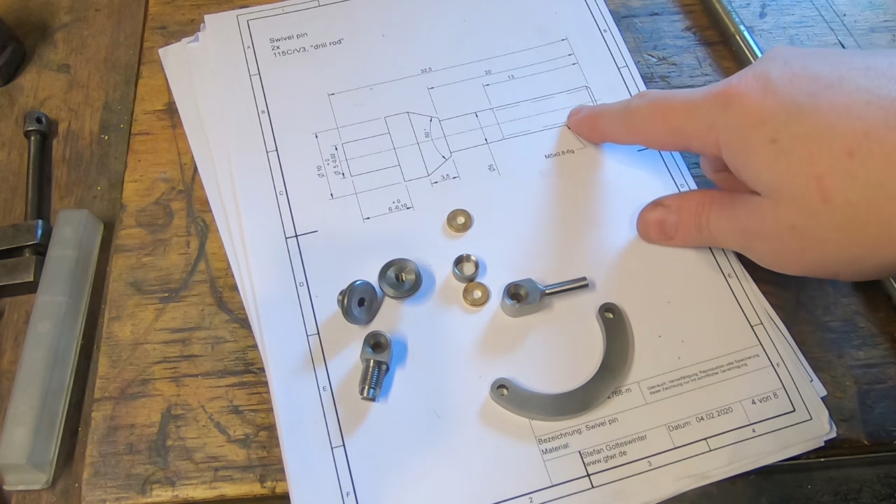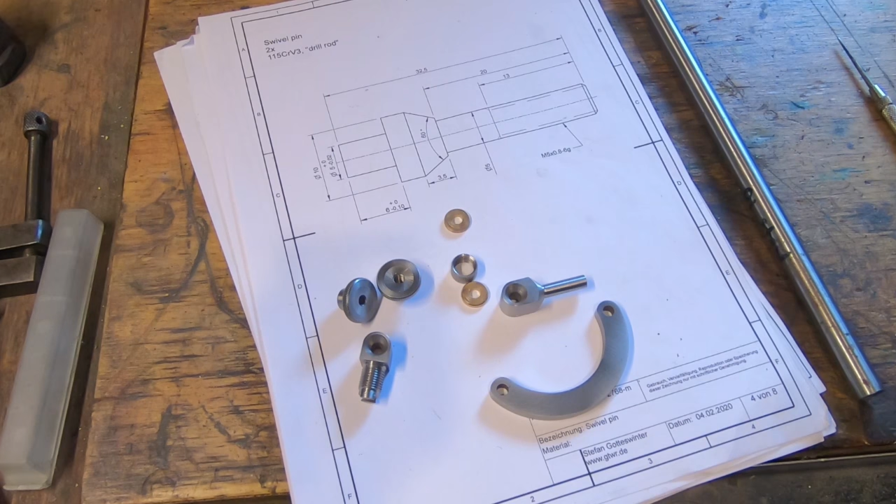Back onto this build. We've got two more bits to make. The last sheet of drawings are these two stems. Now, there are a couple of ways we could do this. I'm going to machine them in O1, which is what it says. Drill rod, 115 chrome vanadium 3. Whatever you want to call it. Silver steel in Australia probably is a more common name for it, but that's what I'm going to make them out of. I've got a bit of 12mm there that should be really good for that.

And I'm just going to leave them unhardened. They've got a thread on them. We could make them in two pieces. We could make this piece through here and then a bush that goes over the top and Loctite it in place afterwards. Probably wouldn't be too shabby actually. It's probably not a bad way to do it.

But the important thing here for me is getting this taper concentric with this. Also because we're making two of them, I don't want to set this taper up twice to do it. That's the sad and unhappy truth, is that if I've got to set it up twice, they'll be different. So what I really want to do is do them last so I don't have to set my compound round straight again to do the rest.

I think at this point what I'm going to probably do is machine this down here to this diameter, which is 10mm, and then I'm going to machine this here to 5 and put a thread on it. And then I think what I'll do is part them off, put them in a collet and turn them around and machine this end, put this in a collet and put the tapers on them.

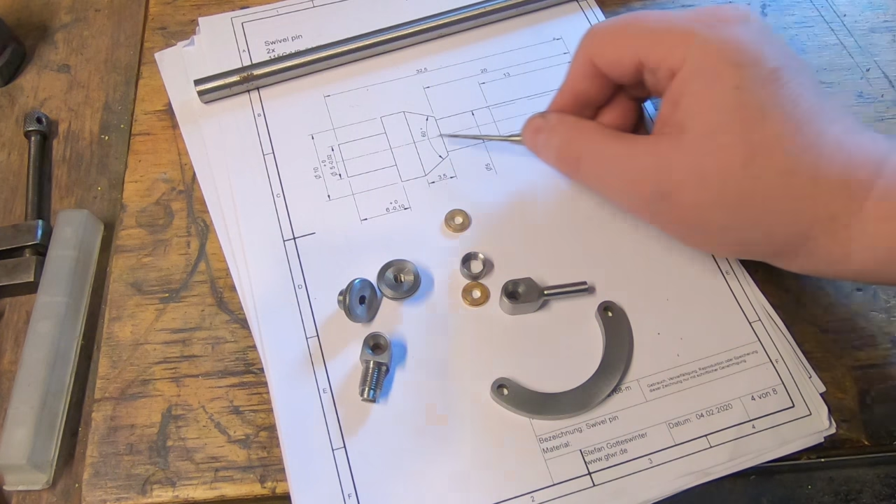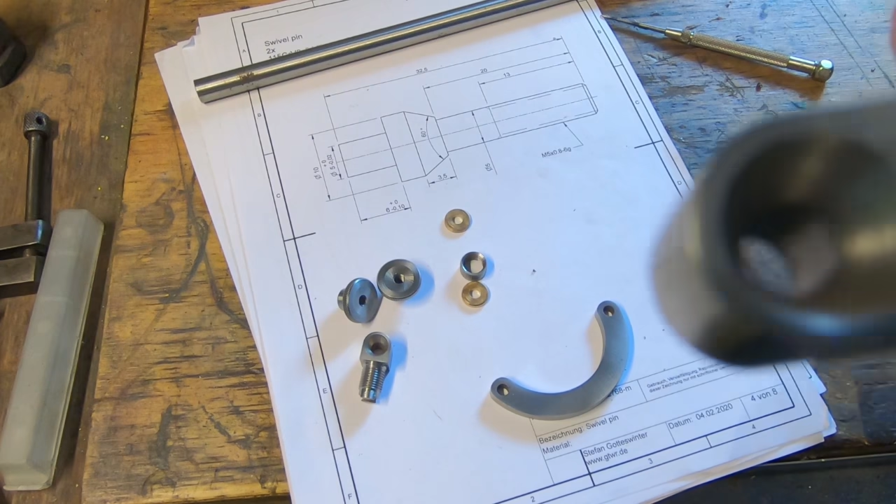So that way I can do them in batches, so I can do the two of these down to size with the thread on them. We can do these two the same size, and then we can do two tapers the same. And hopefully they'll all be concentric. That's the theory. So these are the last bits to do, and they've got to fit that taper in there, and they've got to fit that taper there, and they've got to fit this hole in here. So it shouldn't be too difficult. The thread's got to fit this nut.

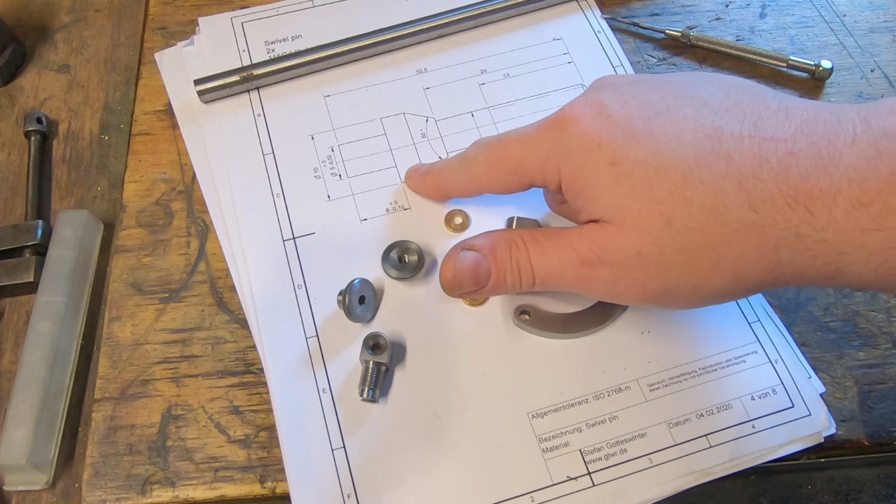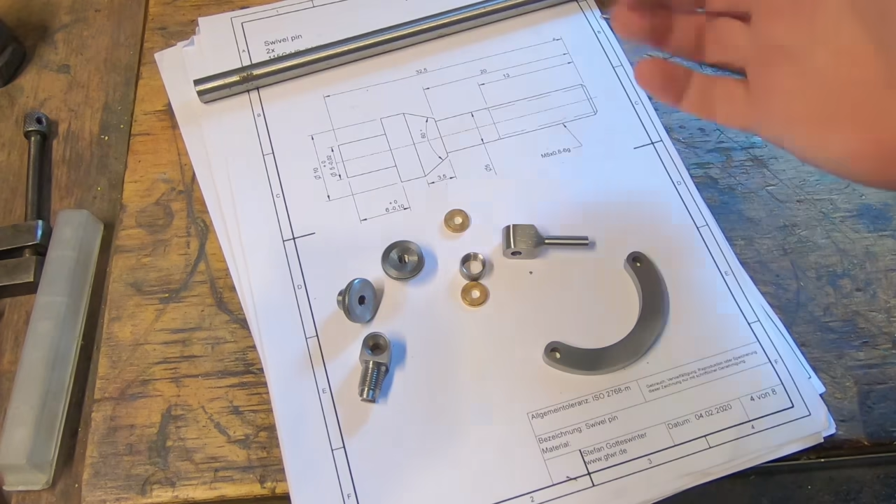We've got the 32.5mm long and 10mm diameter. So we want to stick out 32.5 minus the 6, which is this thickness here, is 26.5 to here, plus, I guess, plus part off. So we need to really stick out the 32.5mm is my thought process. We need to stick all that out.

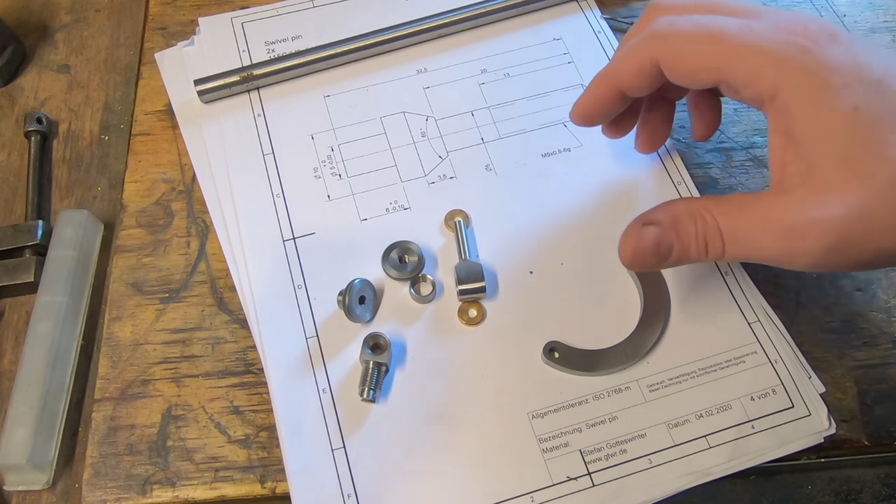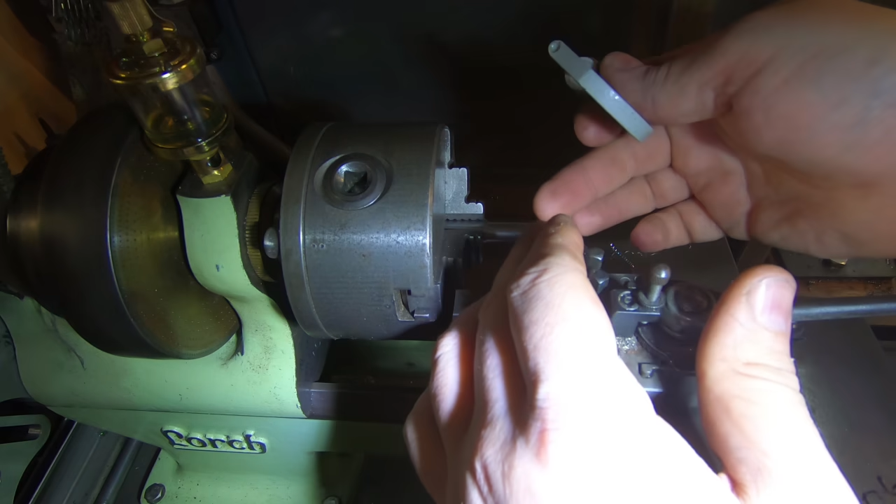So I'm going to grip them here, machine this down to size, and machine this down to size. Is everyone happy? I think I've got that straight in my mind. Let's go to the lathe and do that. O1 steel. That's not too far out there. And next job, I guess, is to machine the rest down to 5 at 20mm long. So if we just touch off on here,

we use the hand wheel as a DRO. That should be 20mm long, down to about 4.85, something like that. So I've got that down to size.

Here's a useful tip: make sure these fit reasonably well. They snug up on the taper, but make sure they fit and are a good sliding fit before you part this off and turn it round, because then you're kind of screwed, because you can't really fix this afterwards, I don't think. So that's a pretty good fit for both parts. I actually discovered that the drill I was using to cut the holes was a fraction undersized, and I ran a reamer through them just to clean everything up.

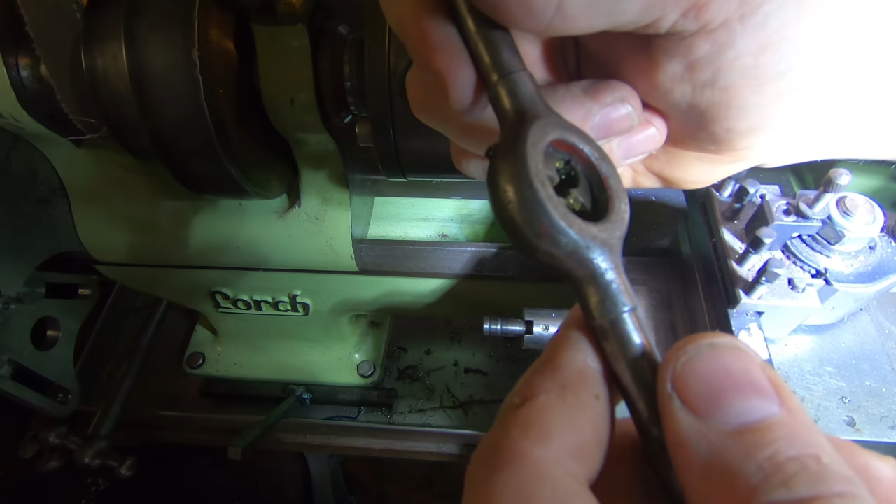Now, what's the best way to cut this thread? It needs to be 13 millimeters long. It probably doesn't matter if it's got a land in the back and we screw cut it. I don't like to do that because there's a fair bit of pressure on that and it sticks out. I'm just going to cut it with a die, I think, and opt out there. So I've got a die stock. If you can find a decent one, a metal one. This needs a do up, and I might do that.

I'd like to set it up and machine the back of it square, and replace the screws, give it a coat of paint, tidy it up. This is a P&N, it's an Australian one. But make sure when your die sits down in, everything's nice and clean and it sits down on the machine face in the back nicely. If it doesn't, you'll end up with a crooked thread or a thread that cuts oversized.

It's got an open end or an end with a taper on it and an end without. You should cut on everything with the end with the taper on it. There's a bit less cutting force and less likely to break, especially in hard steel.

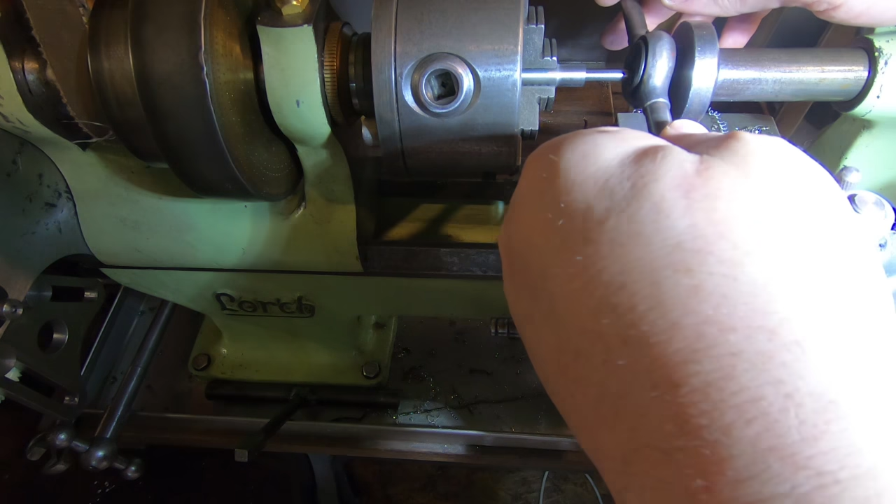I've got a plate for this, which is a genuine Lorch part. I'm a bit sort of lucky to get that. It was in a box with a heap of other stuff that I got from the other side of the world, come from Holland or Poland or somewhere. A little bit of decent cutting oil on there, whether you use Rocol or Tap Magic or whatever, that's the stuff.

Now we want to go until this gap here is about 7 millimeters. Because there's a bit of a taper on the end of the thread, we probably want to go till it's 6 millimeters. So I've got a bit of 1/4 inch tool steel here. I'm just going to go until that just fits in the gap there. Back it off so there's no chip, and slip it back up again. So it still needs a little bit more.

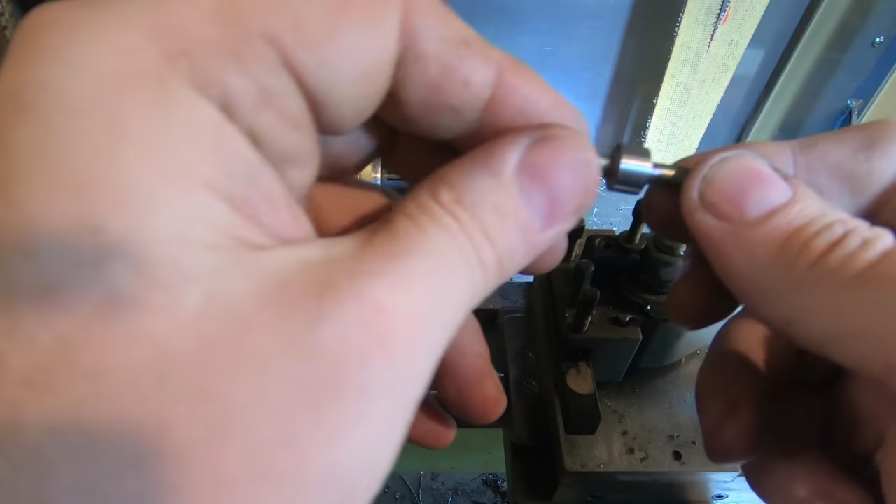Still need to put a taper on him, but they're getting close. And that's well within tolerance really for a Loctite fit. So there's only one operation to do, and that's to put the taper on them. I try not to muck this up too often, because while it's not difficult to put back, it's a job that takes a little bit of concentration.

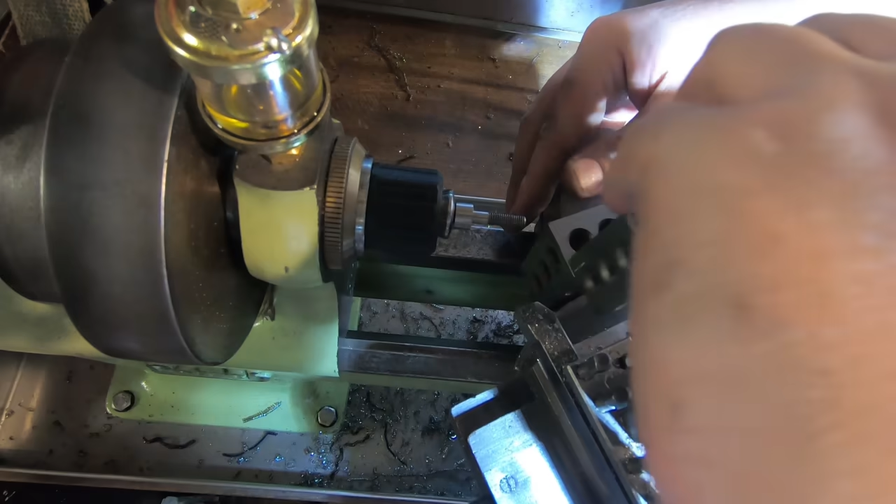Of course, the really good way to do this would be to set it up with a sine bar. We've got too much deflection in this to set it to the part. My general way of doing this is to clean everything here. Generally how I do this is to set this up with a Zed square on the back here, or a Z square if you're American, which is a Stefan Gotteswinter amazing tool, and two 1-2-3 blocks.

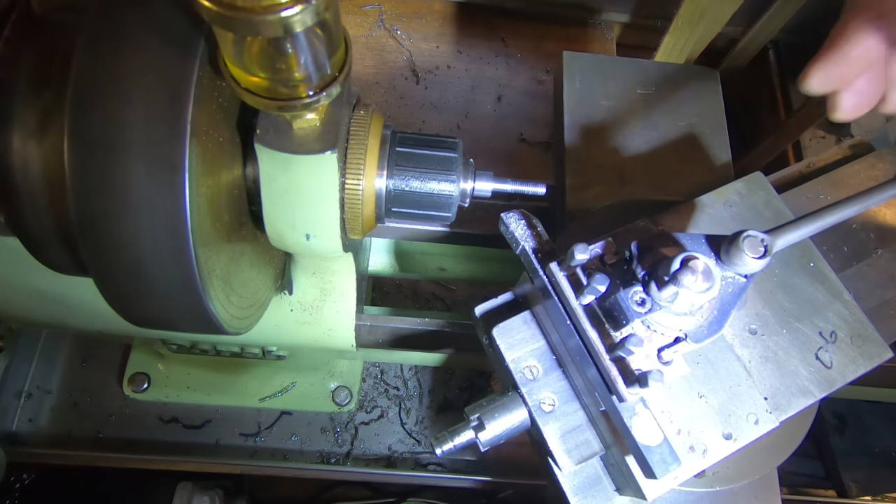When I've got everything feeling pretty snug and nice, just tighten it up. I guess any sort of square will work. However, it's very nice to have a square with a step on it so you can sit it on there and you know it's going to be right. Just make sure everything's snug. Now, the problem here is that we won't get in here close enough. And that looks pretty good to me.

Make a note of that setting on the cross slide, and that looks pretty jolly good. We're not taking a lot off with the abrasive, we're just changing the finish, the way the light hits it, from being a matte finish through to being a shiny finish. So really it's just a matter of reflection to give us that really classy, nice look. So that part's finished. So hopefully these are identical and they look like they're pretty jolly close.

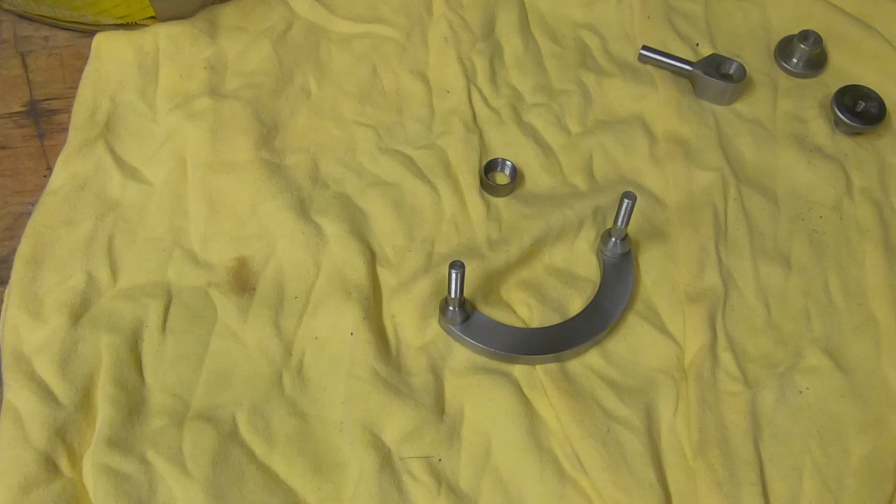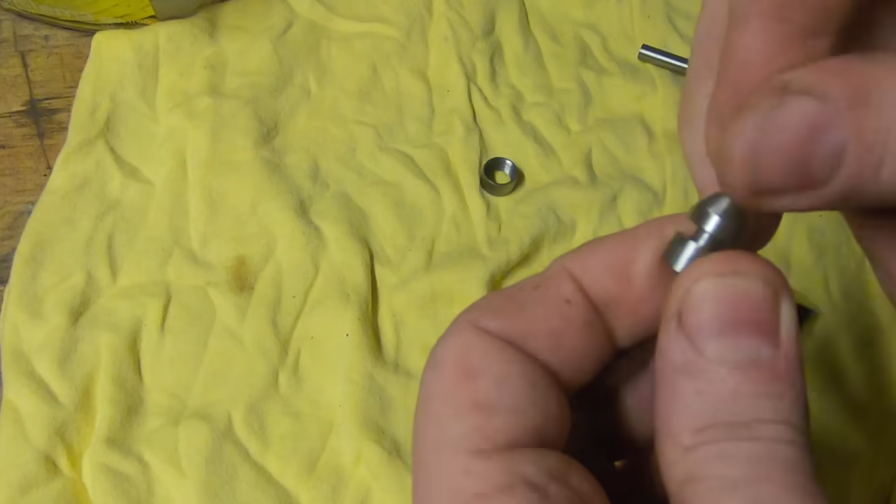Let's have a look over at the bench. Pretty nice. So this is what we got. It's two of these. They go in there like that. And I spent a bit of time deburring these holes because these do have a slight chamfer or a radius on this corner. There's 0.4mm, which I think is the insert radius. Rather than undercut them, I've just put a little bit of a chamfer or a deburr on the inside corner here. And that sits them in there nicely.

If you don't do that, they've got a bit of a gap in them. So that looks pretty good. It's nice and smooth and pretty nice and neat. Really pleased with that. And they've got a good thread on them. If we close this up here like this, and put a washer and a nut on them, they lock in really nice.

And they should have just the right amount of thread sitting below the nut to be tactile and nice as well. So pretty pleased with them. And that's all the bits. Two of those, one of those and one of those, one of those, and two of those and one of them. That's a week's work. Try not to think of it like that. It is a bit of an investment in the workshop, I think.

I have to work out how to finish this, and there's probably going to be another video about this. Whether we make a box for them or what we do, I'm not sure. I'm tossing up whether to blue them or not. That's another thing. We could blue, probably, don't know. I'm not sure how these will blue up. I know these knobs and this nut will come up really nice, and maybe we could leave the rest in a silver, or maybe we could blue it off.